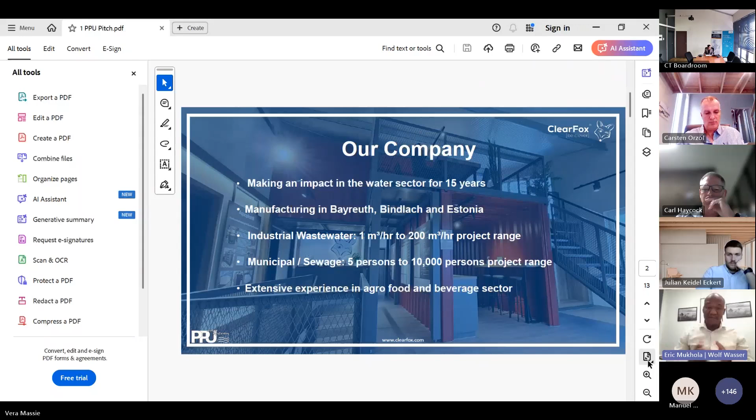About PPU or ClearFox, the company started 15 years ago, back in 2007, with manufacturing facilities across 3 cities in Europe, in Germany. We do wastewater treatment systems for 1 cube an hour all the way to 200 cubes an hour. Within the product range, we've got solutions for sewage treatment or typical municipal wastewater treatment, for domestic systems, from 5 people in a home all the way to 10,000 people. This works ideally in residential estates or smaller municipality applications. We've got really extensive experience, mainly in the agro-processing and beverage sector, but we also do other industries as well. Wish my presentation could have worked because it's got other industries, but that's okay, be that as it may.

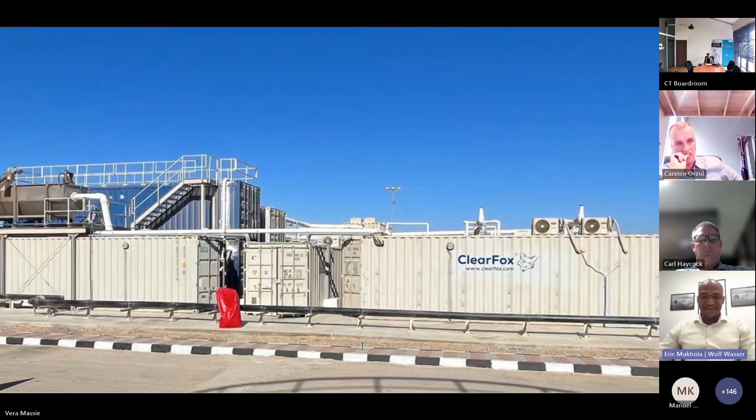Please, if we can go on to the next slide, Vera, thank you. This is a typical setup of one of the containerized systems at an oil drilling facility in the Middle East. You can see the rapid deployment, and this can also be scaled up in stages depending on the site conditions and site requirements.

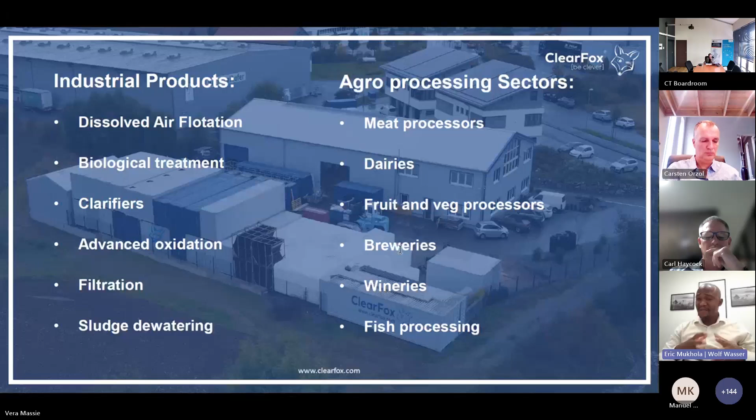It's important to note that treating water for reuse on site is also a possibility. We can help the client do that, provided there's space and budget. So we can treat any type of wastewater to meet any final effluent quality, and we can help with that as well.

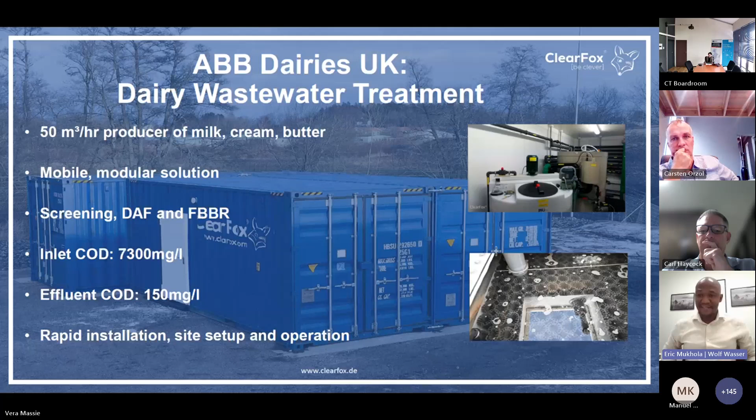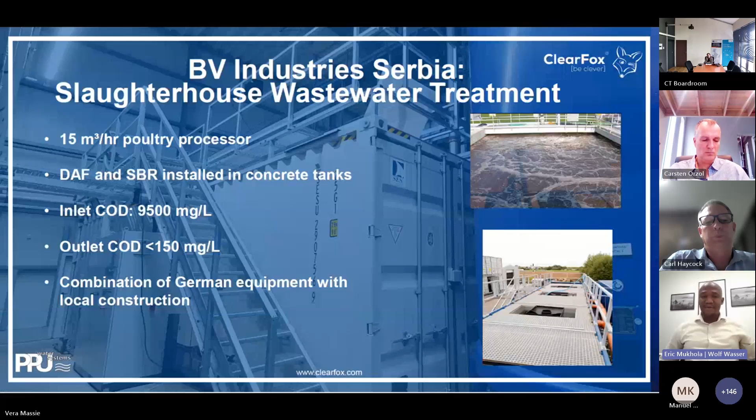Normally when I deal with clients out in the country, what's common is that their borehole water is contaminated, mainly because of the agricultural activities happening above ground. To prevent that from deteriorating even further, we've got solutions that we can help the clients with.

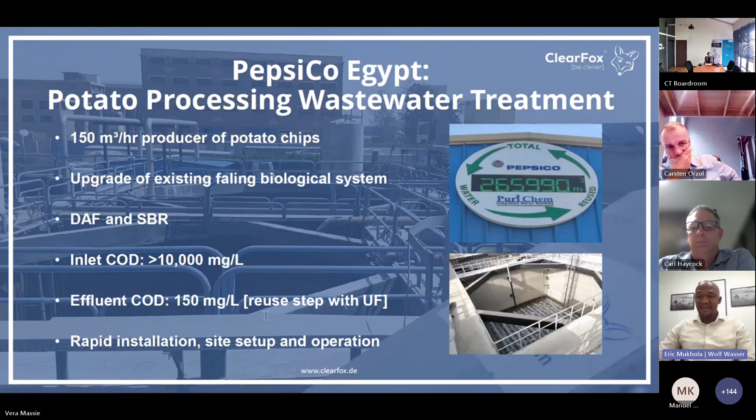This is the similar site that I'm referring to in Egypt.

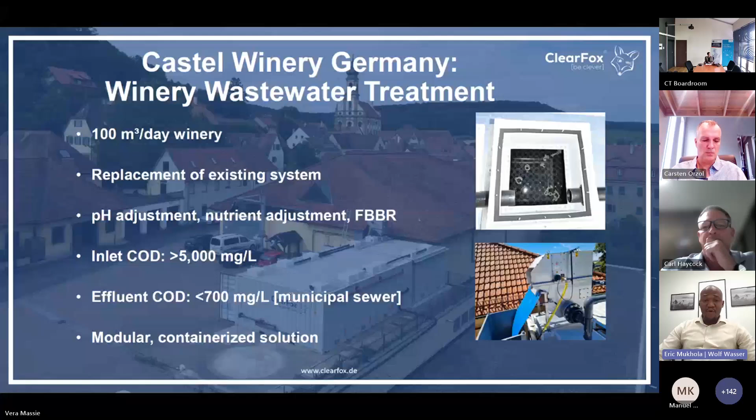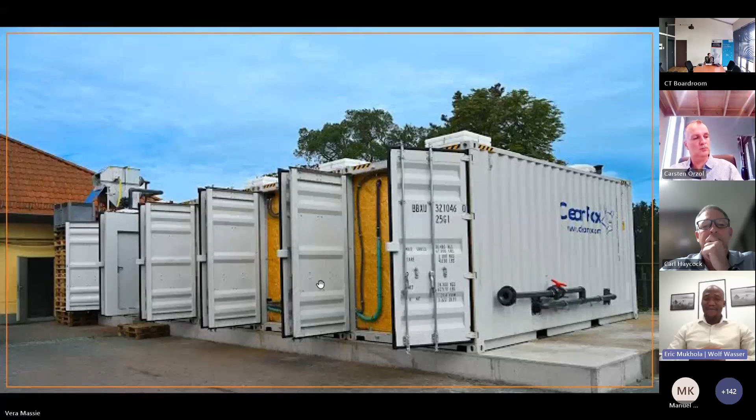I think, okay Eric, unfortunately I'm going to have to cut you short, I think you've got to wrap it up. Okay, no, I think we are done. If we can maybe, because this is the same winery, go to the next slide. I'm trying to, yeah, there we go. So yes, thank you, I was sort of moving.

I just wanted to get to the contact details as well. If they would like to start engaging with either us as Wolf Wasser in SA, or it could be talking directly to PPU in Germany as well, they will be eager to assist.

Thank you. Yes, and please Eric, don't be shy, put your contact details into the chat as well. Thank you. Okay, I'm going to stop sharing. Thank you very much Eric for that. And it's great to see - I'm looking forward to South African projects in collaboration between you and PPU Umwelttechnik.

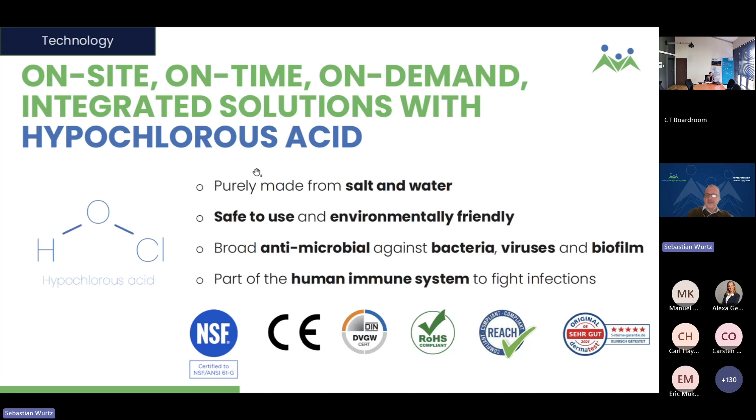We produce hypochlorous acid, or more correctly said, we enable our clients to produce hypochlorous acid on site, on time, and on demand - where, when, and at what quality or capacity they require it. We do that by two things: we integrate customized generators to produce hypochlorous acid into their existing equipment, into existing infrastructure.

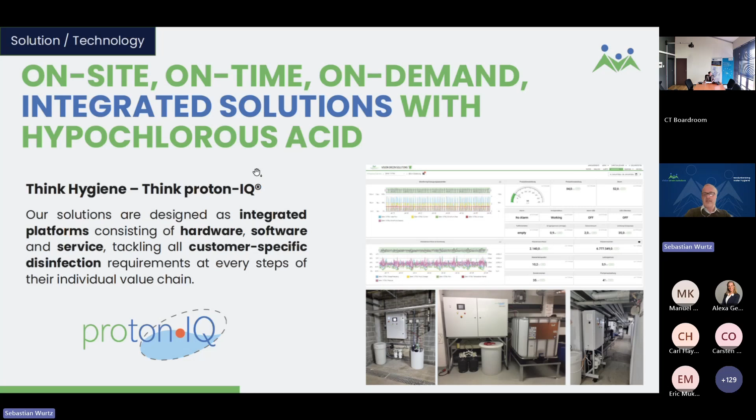So not just putting a piece of hardware somewhere and leaving the client alone, but really integrating it into existing production or operation processes, adding our digital solution to that hardware or equipment, which monitors and measures the process quality all along our clients' value chains, and using that information to control the production and the application of our solution at every specific and required step to the required degree.

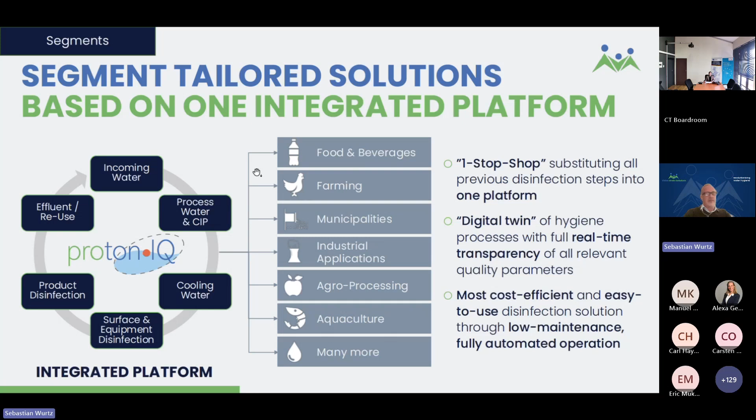This is just an overview of industries and applications we are currently active in. As I said, food and bev, farming, agro processing, and on the municipal side, mainly drinking water and wastewater.

And from those applications, I've selected just a few references, because real projects always tell more than marketing slides. In this case, it's a German mineral water producer who brought us in about 2 years back because they were struggling with one specific step with the water quality at one specific step of their production process. This was a perfect example of no water, no production, because they repeatedly had to stop production because they couldn't maintain the water quality at that step.

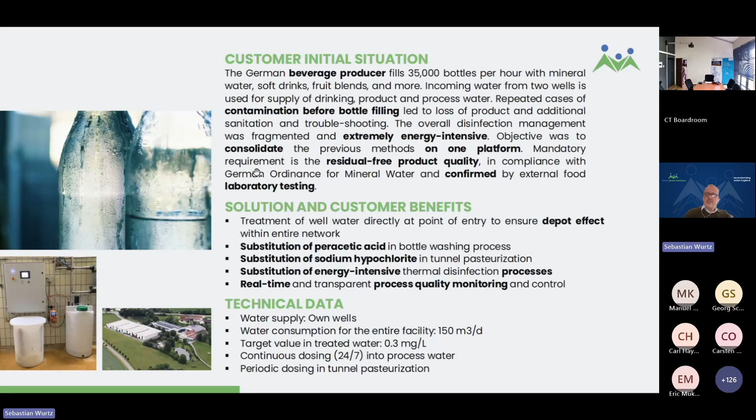We came in, we substituted the previous UV system there, and having our solution integrated and embedded in their processes, we developed that into a full platform. Over the last 2 years, we substituted all other chemical disinfection steps, also thermal disinfection which they previously used, allowing the customer not just significant cost reduction, but now providing with our software solution full transparency about the entire process quality.

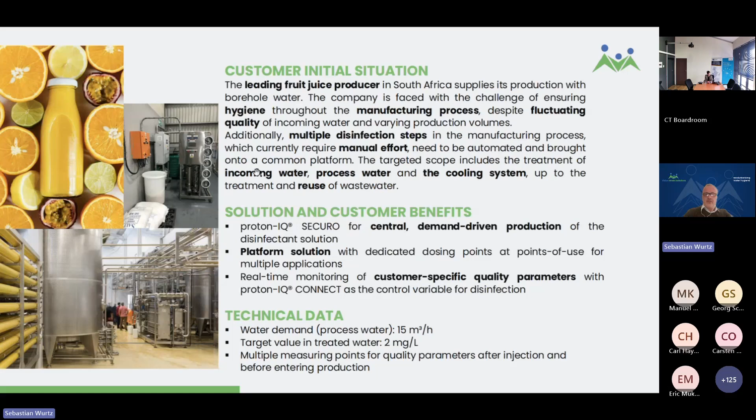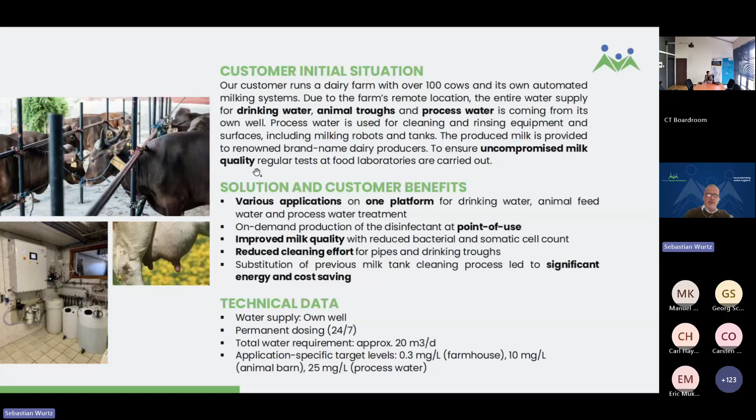Local project to wrap it up: municipal drinking water treatment here in the Western Cape, which we've implemented about 5 months back. Replaced the usual suspect, hazardous disinfection done very manually, a very manual process. The customer is now running a fully automated system at a quite remote location, so wouldn't need to send people across his region, but having everything basically automated, safe, sustainable, remotely monitored, and is running that site at below 1,000 rand, so below 50 euros a month, and is very happy.

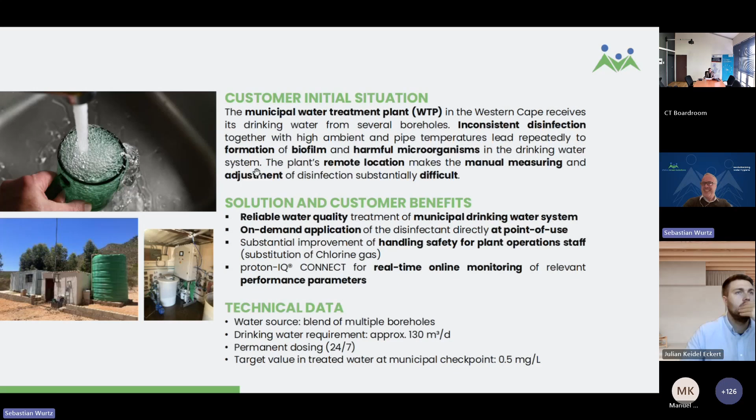You've seen the site, Vera, you first-handedly got the feedback from the client. Yep, that really was a highlight in our local history. Thanks very much.

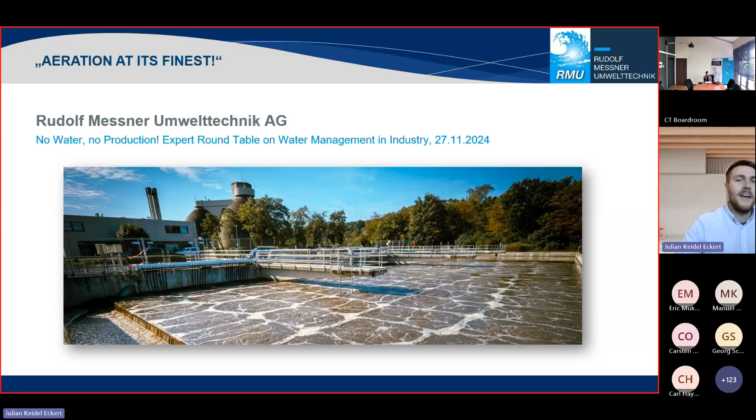I would like to give also a short introduction of my company, Rudolf Messner Umwelttechnik, and the portfolio we do. I also will start directly as I just have 5 minutes. First of all, a short introduction of myself: I'm an international sales engineer and I'm in charge of international projects. That's my contact, if you have any questions afterwards please feel free to write me an email or something.

What are we doing? RMU is the short form for Rudolf Messner Umwelttechnik. We are specialized in biological process and aeration technology for municipal and industrial wastewater treatment plants. We have for that different membrane applications, and we've been present in the market for more than 45 years with installations worldwide. We try to work in several countries with distribution partners. We have 2 daughter companies, in the US and in the Netherlands, where we do our business directly, and we also make direct delivery business from Germany in various countries, especially in Europe.

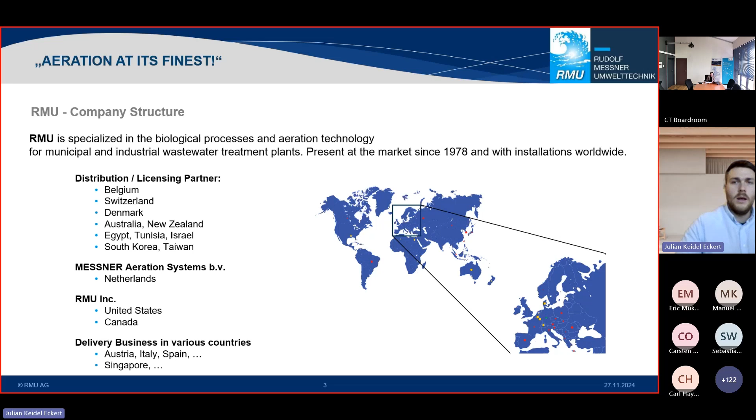Let's talk briefly about our product portfolio. Our main product is our Messner aeration panel. We have two different sizes, the Messner Classic with 2 square meters and the Messner Compact with 1 square meter. We use them for diffusing systems in any type of wastewater treatment plant.

It doesn't matter if municipal or industrial wastewater. What we change is our membrane types. We have different application membranes depending on the temperature, depending on the conditions of the water, depending on the industries, what we can use for that.

Beside our panels, which is our main product, we have our own Messner control unit to exactly control the aeration tanks or the whole aeration system on the wastewater treatment plants. We can measure with sensors oxygen demands, ammonia, phosphorus, carbon compounds, and based on that we figure out how much air we have to bring into the tank.

Sometimes the customer requires also liftable solutions. For that we have our own Messner lifting solution. We have an exchange and refurbishment procedure to get our old panels after their lifetime back and refurbish them to do something for the green planet and not use all the resources which are necessary. We also have our own dosing unit system for maintenance action.

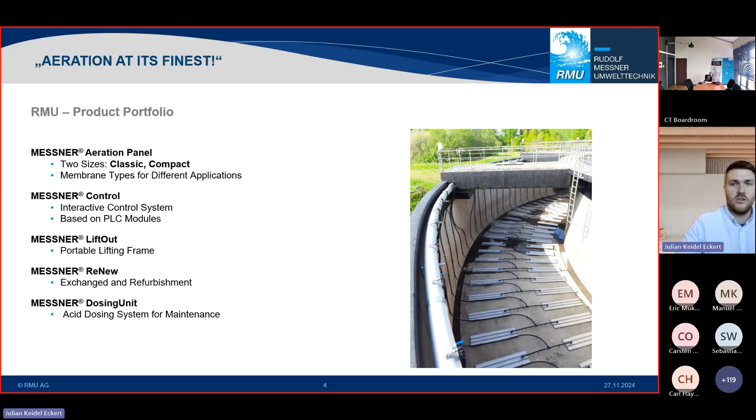For our main product, the Messner aeration panel, it is pretty unique on the market, especially at that point. Compared to most of our competitors, we use stainless steel as ground material for the base plate and all the retainer bars and side bars, which results in an unlimited lifetime for a wastewater treatment plant when we compare it to membrane systems and other plastic diffusers.

Furthermore, we use a specific permanently elastic thermoplastic polyurethane membrane, which doesn't use any plasticizers or other additives, and has a way longer lifetime than comparable diffusing systems with EPDM membranes, resulting in an expected lifetime of up to 20 years. We use a unique perforation, which is pretty small, so we can reach a really small air bubble.

Size from 2 to 3 millimeters in diameter. The smaller the bubbles are, the longer they stay in the tank, and the longer they stay in the tank, the higher will be the transfer efficiency of the air bubble of the diffusers itself, saving a lot of energy.

Usually we assemble our panels directly on the floor, and with our panel design, we can mount them as close as possible to the floor so we don't lose any dead zone where we cannot aerate the treatment plant. So we're just maybe 2 to 5 centimeters above the floor of the tank, which is pretty unique compared to the competitors.

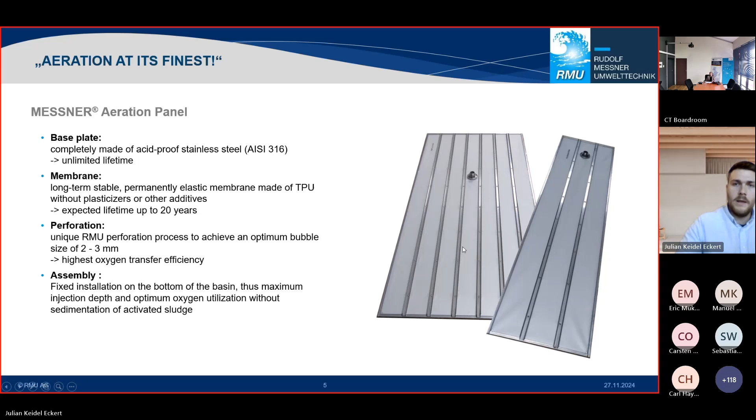Now I would like to show you a short reference. This is a reference we have in Germany, which has a big impact of industry. That's why I want to show you that, where we also used our industrial membranes.

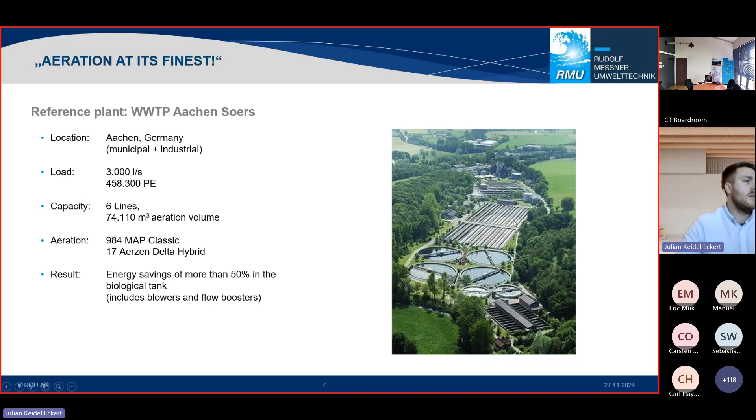In this case, we installed about 1,000 of our panels in 6 lines, and the result was, to summarize it already, an energy saving according to our high efficiency of more than 50% in the biological tank.

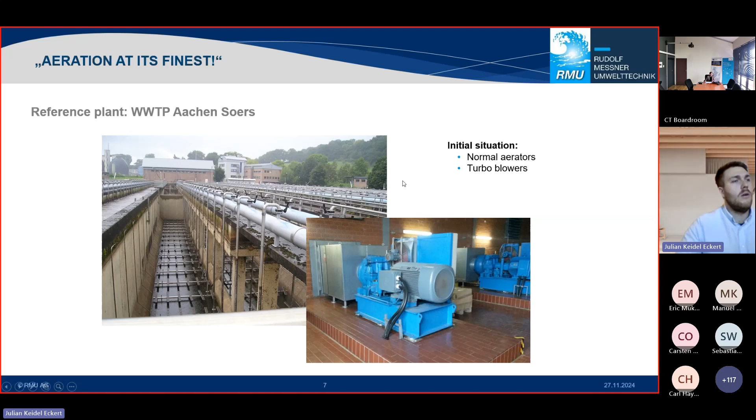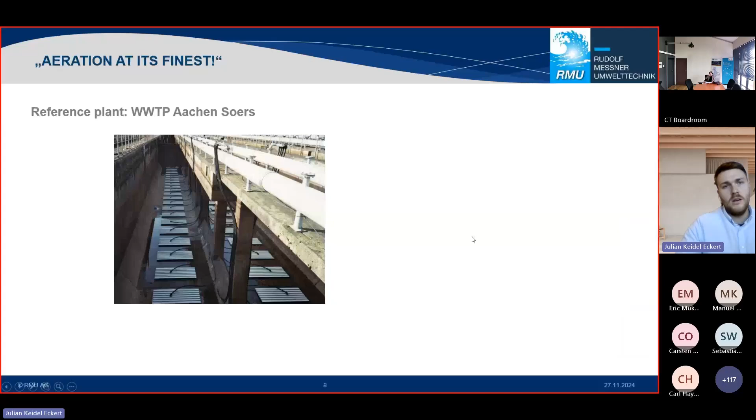We dismounted the initial diffusing system and also, with our partner Aerzen, the old turbo blowers which were there installed, and changed the process itself to a more flexible zone part. Here you can see how we installed our panels also in operation, and here the Aerzen Delta Hybrid blowers close to the tank.

To summarize it, we could really decrease the energy consumption by optimizing the whole biological part of this treatment plant by 55%. And when we look at the whole treatment plant, by 33% of the energy consumption.

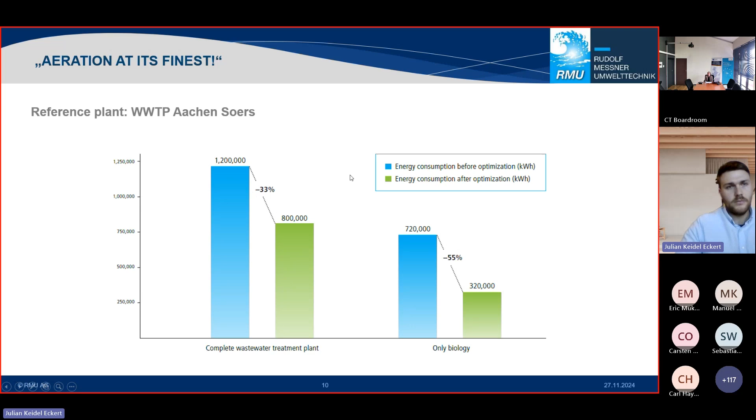To stay within time, I just want to summarize at the end the advantages of our panels. We have the highest oxygen input and efficiency on the market without needing that much energy. We reach a really low power and CO2 consumption. We have our special TPU membrane and perforation.

We use 316 stainless steel as base material, which has better impact on the environment compared to plastic, because we can renew it again and refurbish it to use it again after the service lifetime of approximately 20 years, which is also pretty unique already.

Regarding all that materials, we get a high operational reliability and stability. The refurbishment possibilities I mentioned already. We need very low maintenance, and we can use our panels, depending on which membrane we use, for almost any kind of industry, and also, of course, municipal wastewater on the market. And of course, the last point, we have more than 40 years of experience on the market. Yeah, thank you for your attention.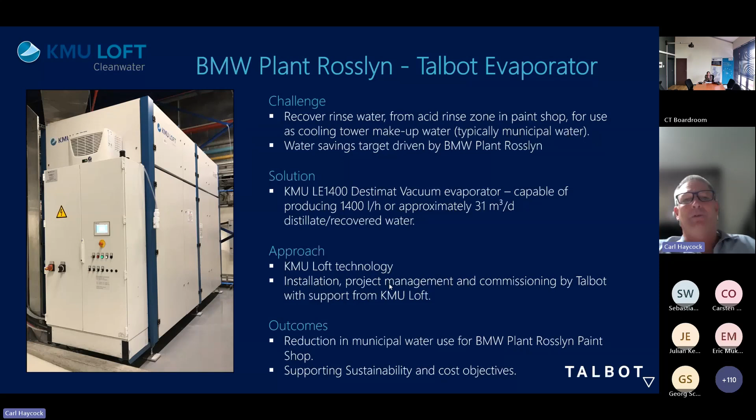So the approach was KMU Loft technology - we were appointed essentially by BMW. The project came from the customer through KMU Loft to us, but because of our BEE level in South Africa, the customer wanted to appoint us and then use the KMU Loft technology for the solution, which all parties were quite happy with. We did the installation and project management, and KMU Loft supported the commissioning and training on site. The outcome is a reduction in municipal water use, supporting the sustainability goals and objectives of BMW in that instance.

The second project, more recently done, is Interwaste leachate from a landfill - obviously a very complex mixture of organics and pollutants, including heavy metals, ammonias, etc. They needed to dispose of this effluent, and essentially the challenge was potentially risking their entire hazardous landfill operation. So we looked at a solution which incorporated 2 KMU Loft evaporators, a customized 2-pass RO system, and then ammonia stripping as well as an ammonia scrubber.

The KMU evaporators were selected over all other evaporators, initially by ourselves, and then the holding company of Interwaste, the Séché group in France, even screened the KMU evaporators against their own evaporators that they developed elsewhere in the world specifically for this process. The KMU evaporator was ultimately selected due to its robustness and ability to tick the boxes and deliver the requirements.

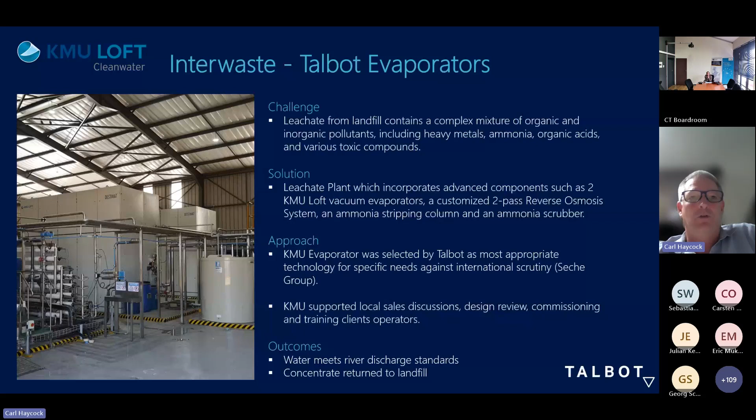KMU supported local sales discussions, so we'd include them in our meetings with the customer, design review, commissioning, and training of the client operators as well - to a degree, we support that too. The outcome is that the clean water is able to be discharged to river, meeting river standards, and the concentrate is returned to landfill. That gives you an example of how an opportunity generates opportunity for the parties, in collaboration with each other, for clients on both sides of the ocean, so to speak.

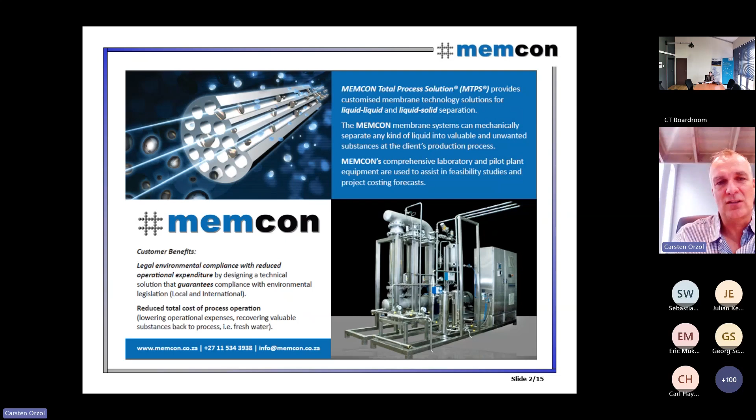So we are very niche in that we have different industries that we supply into. Number one is the task definition. We talk a lot about industries and solutions that we could provide, and we do lots of lab tests, which is very important.

Again, German companies, if I may say, there are lots of good products. We saw the blowers, for instance, the aerators, we saw the hypochlorous acid manufacturing. So we need to understand in South Africa how to put these products into operation to make it a complete process solution. I think this is essential to anyone out there, especially on the German side, that you need a local implementing partner, feet and hands and ears and eyes on the ground here, understanding our markets and how to approach them. That's a different discussion and a different engagement with our clients in South Africa, different to what I would say is the modus operandi in Germany or Europe.

So lab test, pilot test, MEMCON does all the engineering and guides the client. That's also important, you need to become a partner to the client, not just a supplier. You need to guide clients through the process and the solutions they need.

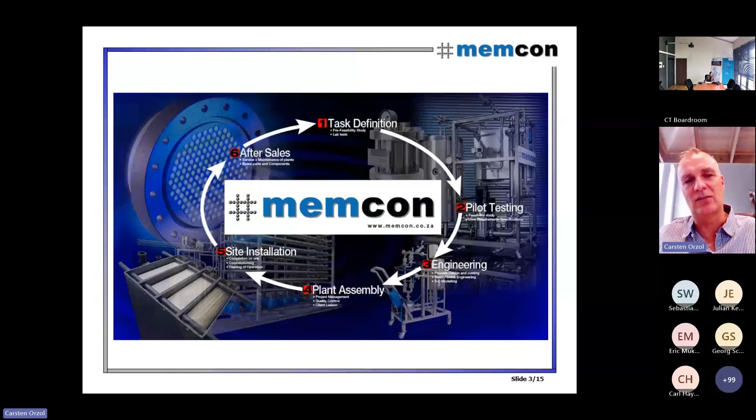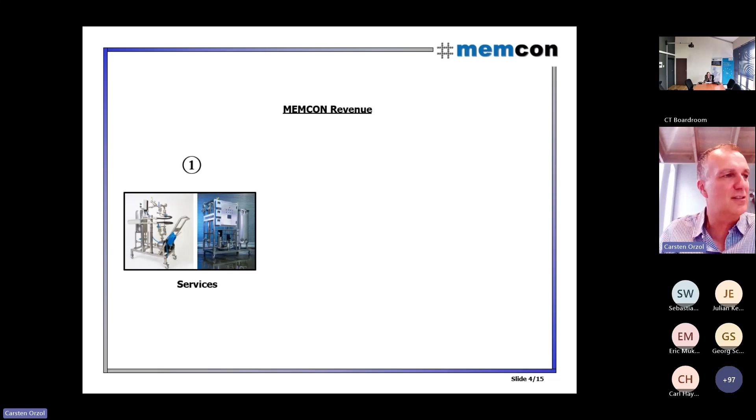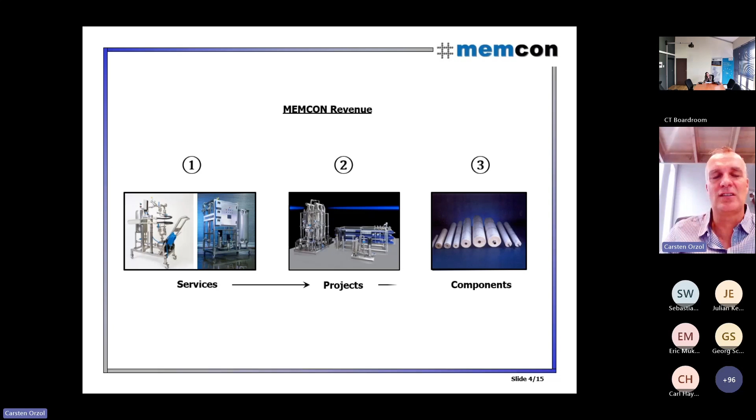So in our case, we do a lot of R&D, lots of services in terms of lab tests and pilot plant tests. We take liquids from clients - we were just delivered certain oily wastewaters, we got delivered spent acid, we got delivered all sorts of wastewater, supposedly wastewater, kelp extract, hormone extracts. So there's a lot of industries in South Africa that all need a very specific approach. From services and R&D, we go to projects and then hopefully sell components afterwards. Again, very important for anyone that wants to get into South Africa - you need very good support in terms of customer services and after-sales support.

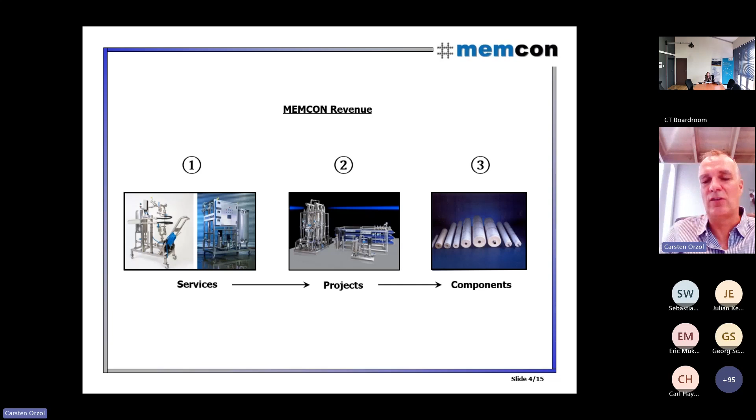That's exactly why we started here in South Africa, because no one really looked after equipment that was supplied once, and then everyone runs away. So sustainability is a very important buzzword. And with that, we go into dairy wastewater, metals recycling, acid recycling, milk solids, dairy operation, cutting fluids, paint shops. So, water, as you can see, is always a byproduct. One must not just look into where do we get water from, but we can add value by recovering, recycling, and reusing the big 3R of water from the process liquids.

Dye industry, tannery, landfill leachate. Lots of industries are here. Many are very big, some are not so big, but wherever there are process liquids, there's already a potential to save and recover water and add value on the concentrated side.

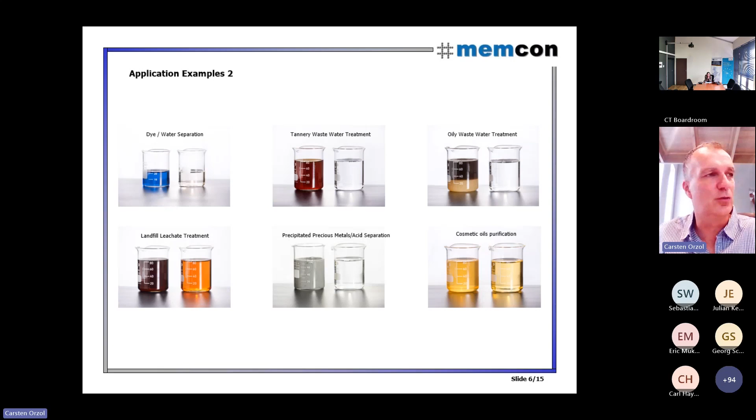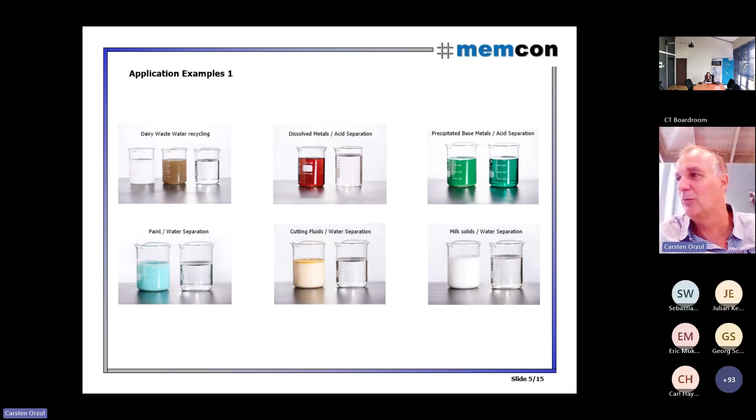So we must not always just think we make fresh water from wastewater. We can even produce water out of milk. There's a project for concentrating milk for transport purposes. They want to concentrate the milk by extracting water to reduce transport cost. That's great for transport and handling of concentrated milk, but you also get a lot of water generated from milk. So we can make water from milk. We still work on making milk from water though, so that doesn't go both ways, sadly.

So our world is the process side, with all sorts of membranes, many from Germany, many from all over the world. These beautiful products we put into operation here in South Africa with our team of engineers. We are based in Johannesburg, and that's where the R&D and project management happens.

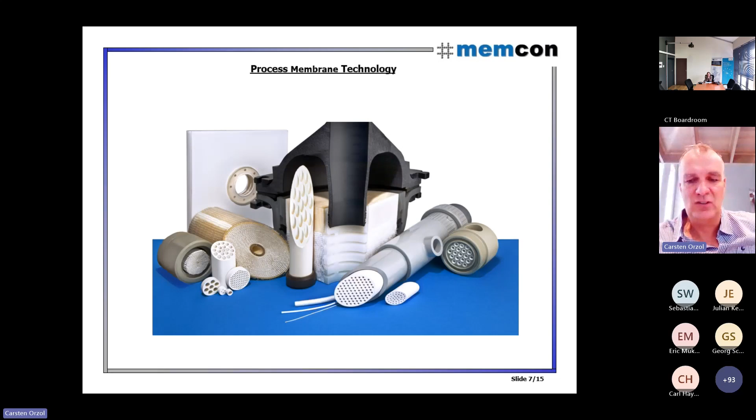As an example of agencies, what we do as Memcon, I can welcome other suppliers in the forum to contact us or someone else here in South Africa, if you think you have a product that fits these types of solutions.

One of our agencies is Mann & Hummel. Doesn't ring a bell probably to most of you, but they're very, very big. It's a multi-billion euro corporate in air filtration. So if you open the bonnet of your vehicle, you might find a Mann & Hummel air filter. But they also stretched out, acquiring TriSep in America, Microdyn Nadir in Germany, Oltremare in Italy. So it's a big membrane house with a huge range of submerged membranes, ultrafiltration membranes, and various water membranes like RO and nanofiltration.

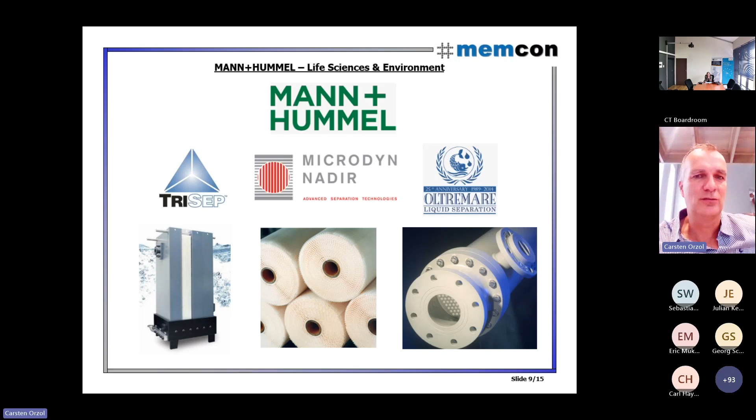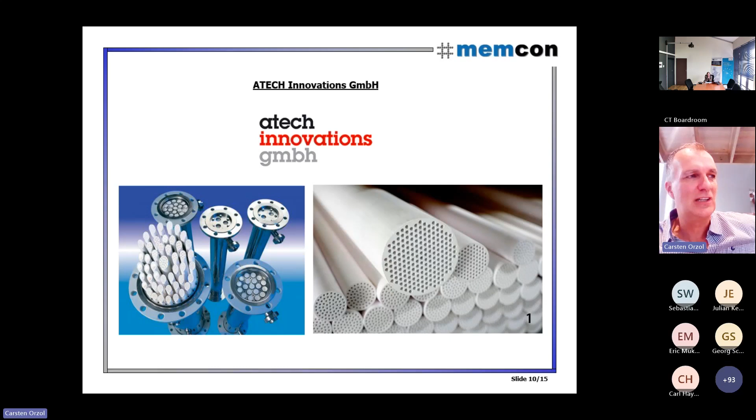The other one famous in our industry is ATECH Innovations, based in Gladbeck, Germany, ceramic membranes. But all of these products are obviously useless without the implementation and building plants around them, and that's exactly where we come in. So I also want to highlight three quick cases.

To give you context, for instance, industrial wastewater, high COD wastewater. The entire food industry struggles tremendously to get rid of high COD wastewater. It many times exceeds sewer discharge limits. So what must they do? A solution would be MBR, membrane bioreactor technology, where we convert the industrial wastewater from the dairy back to fresh water, either for irrigation, or we take it even further for drinking water for reuse in the factory.

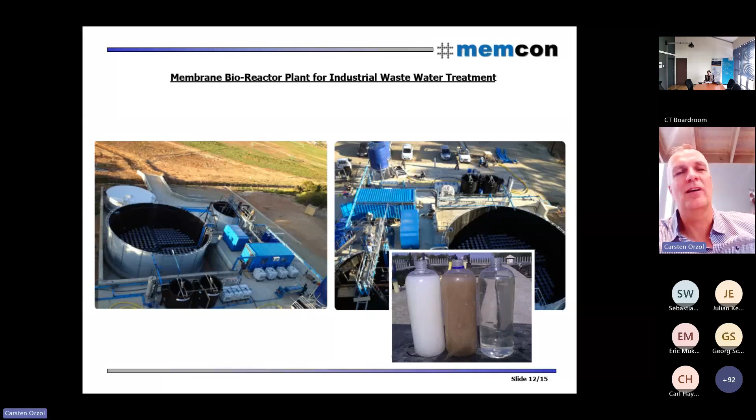That's the whole phased approach we also need to learn in South Africa. You're not just going the whole alphabet from A to Z with all the technologies. Typically you start in sections and phases just to get them to a certain level to be legally compliant, and then you add more value and go on until you add more and more value all the way to water for reuse. That's important, and that's why I stress the word partnership with the client. South Africans love to be in partnership. They like to have someone they can call on, the go-to guy. So become the go-to guy to your clients. That's very important, what I learned.

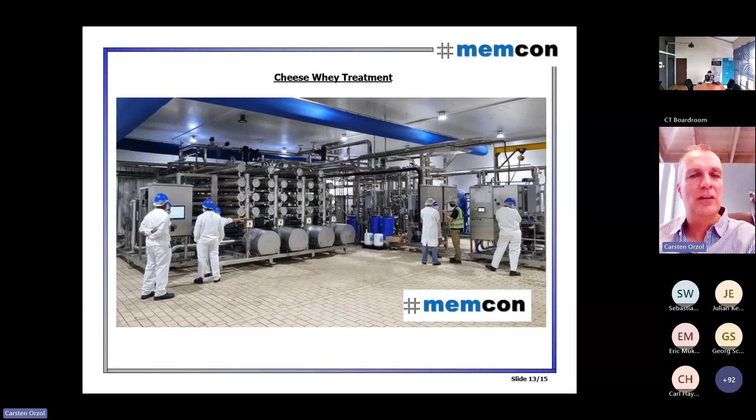The second of the three operations is, for instance, cheese whey treatment. Memcon built lots of plants for whey protein recycling, concentrating and purifying from cheese whey. If 100 liters of milk gives you 10 kilograms of cheese, then 90 kilograms is the whey, full of protein, lactose, minerals, and other good stuff. That's what we process at large scale here in South Africa, including the pre and post treatment and silo management, producing a protein concentrate that goes to spray towers, but then also as a final product, water again—water for reuse, for CIP, for floor wash, and for cooling towers, etc.

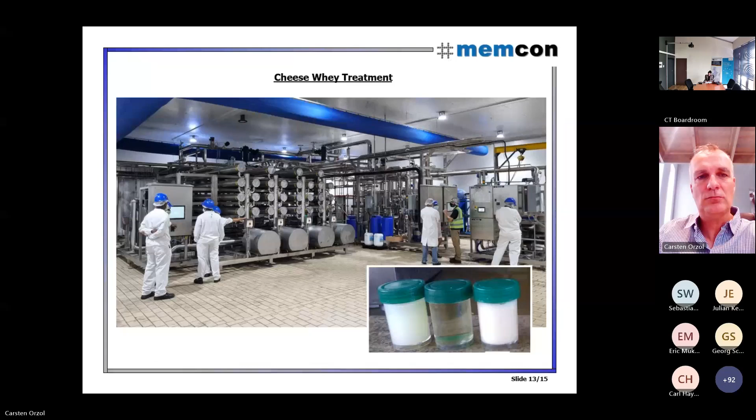In combination, we built complete process plants that take a hazardous waste - and it is a hazardous waste, you cannot just dispose of it into sewer - all the way back to fresh water for reuse in operation in the factory. These are the concepts I'd like to table here, as an engineering and solutions provider, I'm sure the same goes for Carl. We look into complete turnkey solutions, how we implement A to Z, flange to flange solutions to the client with ownership, ongoing support, ongoing validation and technical training.

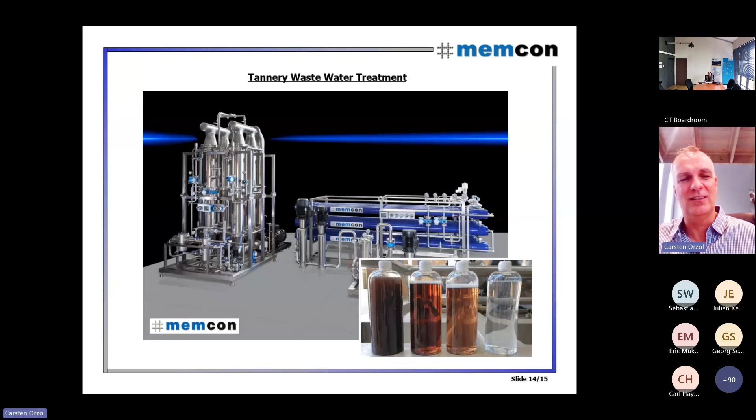We have problems in South Africa with staff. Lots of trained operators leave and move around. We have a so-called brain drain in South Africa where clever people leave the country because they can, and move over to Australia, America, UK, or Arabian countries. So it becomes a challenge to operate high-tech equipment here in South Africa and implement it.

So with that, I'm rushing through there, Vera. I know you love me for that, but yeah, I have to, I guess.